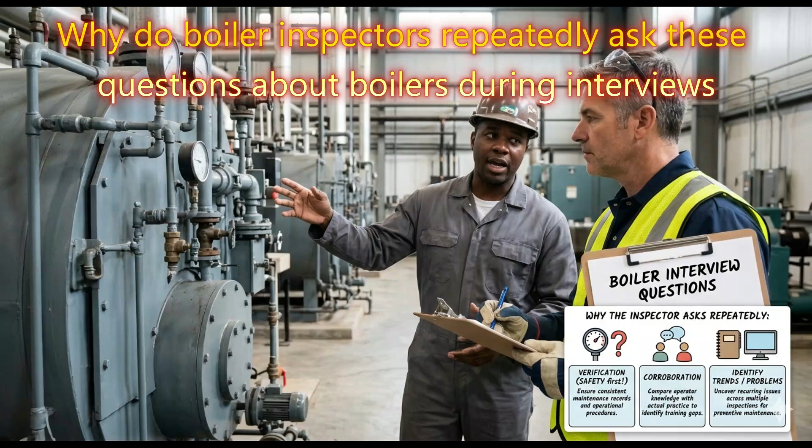Why do boiler inspectors repeatedly ask these questions about boilers during interviews? Discover the most frequently asked boiler inspector interview questions, evaluation criteria, answer strategies, and key competency areas. Essential preparation guide for boiler operators, attendants, and plant engineer candidates aiming to impress inspectors and secure boiler jobs in 2026.

What is the first priority during a boiler emergency? Answer. The first priority during a boiler emergency is protecting human life and preventing further danger. Operators must immediately follow emergency shutdown, stop fuel supply, and activate alarms if necessary. If there is a risk of explosion, fire, steam leakage, or toxic gas release, the area should be evacuated quickly. After ensuring personnel safety, operators should assess pressure, temperature, and water level conditions carefully.

Inspectors ask this question to evaluate emergency response knowledge and safety awareness. Quick decision-making, proper communication, and following standard operating procedures are essential to minimize injuries, equipment damage, downtime, and operational losses during emergencies.

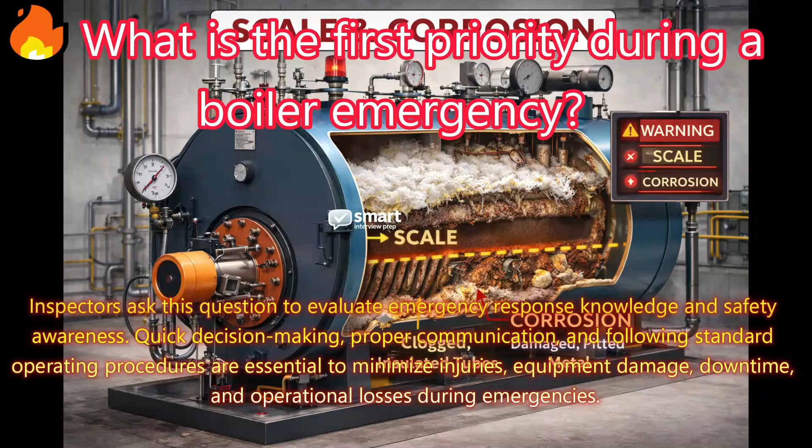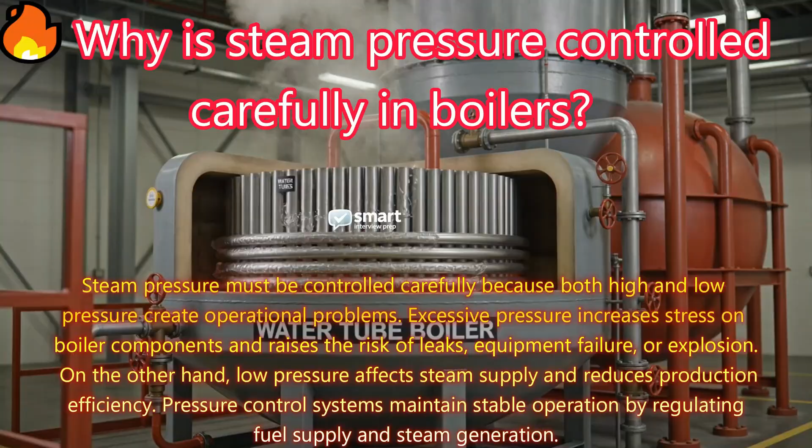Why is steam pressure controlled carefully in boilers? Answer. Steam pressure must be controlled carefully because both high and low pressure create operational problems. Excessive pressure increases stress on boiler components and raises the risk of leaks, equipment failure, or explosion. On the other hand, low pressure affects steam supply and reduces production efficiency. Pressure control systems maintain stable operation by regulating fuel supply and steam generation.

Inspectors ask this question to test understanding of boiler balance and control systems. Proper pressure management improves efficiency, protects equipment, and ensures safe plant operation. Operators should continuously monitor pressure gauges and control systems during boiler operation for stable performance.

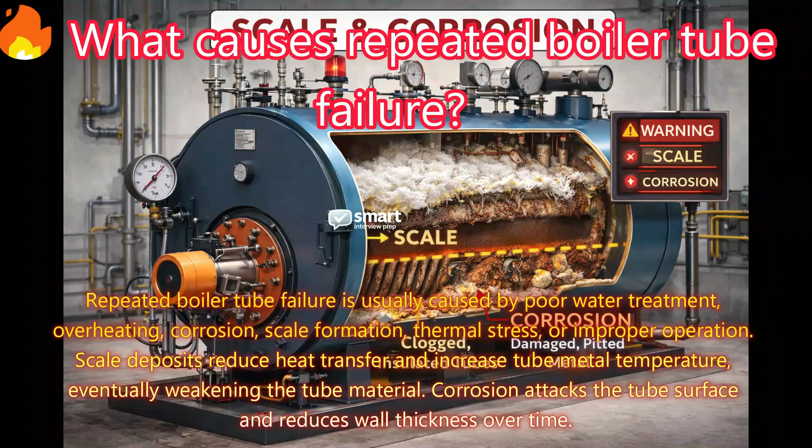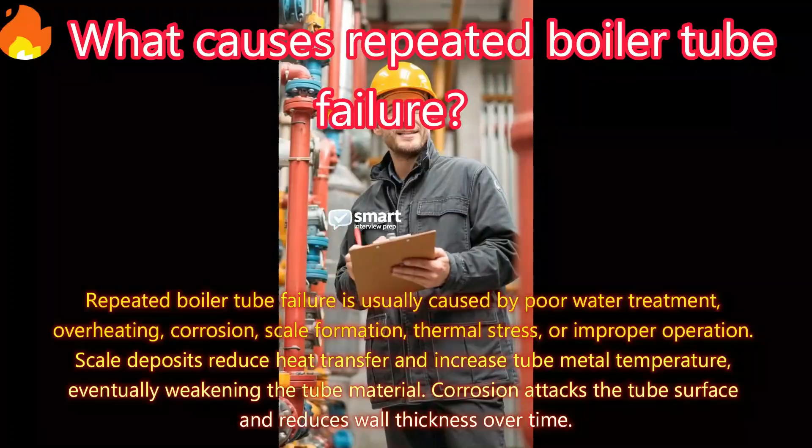What causes repeated boiler tube failure? Answer. Repeated boiler tube failure is usually caused by poor water treatment, overheating, corrosion, scale formation, thermal stress, or improper operation. Scale deposits reduce heat transfer and increase tube metal temperature, eventually weakening the tube material. Corrosion attacks the tube surface and reduces wall thickness. Over time, sudden temperature changes also create thermal stress that damages the tubes.

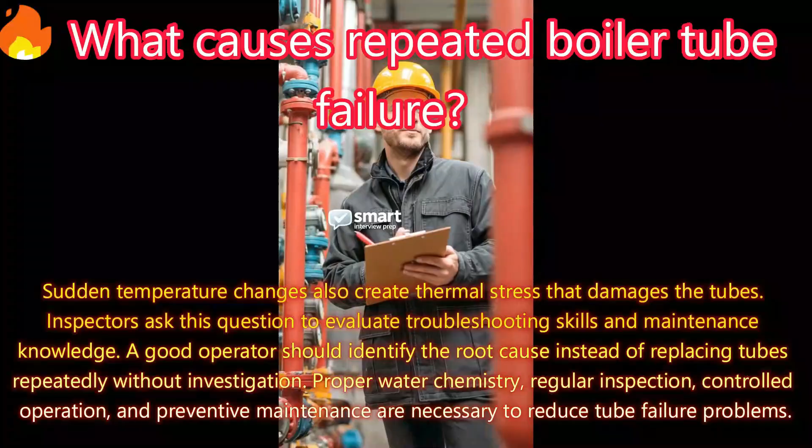Inspectors ask this question to evaluate troubleshooting skills and maintenance knowledge. A good operator should identify the root cause instead of replacing tubes repeatedly without investigation. Proper water chemistry, regular inspection, controlled operation, and preventive maintenance are necessary to reduce tube failure problems.

Why is furnace purging necessary before boiler startup? Answer. Furnace purging is the process of removing unburned fuel gases from the furnace before ignition. Fresh air is circulated through the furnace using fans to clear any combustible mixture. If purging is skipped and ignition starts while fuel gas remains inside, a violent furnace explosion may occur.

Inspectors ask this question because many boiler accidents happen due to improper startup procedures. Purging time depends on boiler design and safety standards. Proper purging ensures safe ignition, protects equipment, and prevents accidents. Every trained boiler operator must follow standard startup procedures carefully to maintain a safe working environment in the plant.

Why should gauge glass be checked regularly? Answer. Gauge glass is used to indicate the actual water level inside the boiler drum. If the gauge glass becomes blocked, dirty, or damaged, it may show an incorrect reading. False water level indication is extremely dangerous because operators may think the water level is normal when the boiler is actually dry. This can lead to overheating and tube failure.

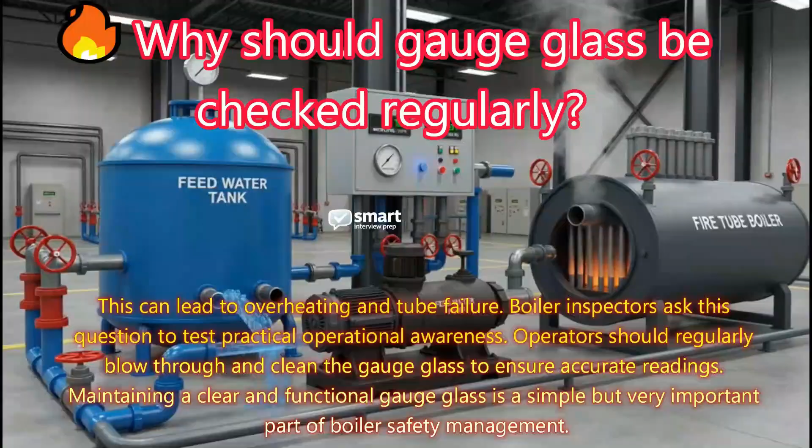Boiler inspectors ask this question to test practical operational awareness. Operators should regularly blow through and clean the gauge glass to ensure accurate readings. Maintaining a clear and functional gauge glass is a simple but very important part of boiler safety management.

What happens if a safety valve does not operate properly? Answer: the safety valve is one of the most critical safety devices in a boiler. Its main function is to release excess steam pressure automatically when pressure exceeds safe operating limits. If the safety valve fails, pressure continues increasing inside the boiler shell. Excessive pressure can weaken the boiler structure and eventually cause a dangerous explosion.

Inspectors frequently ask this question because operators must understand that safety valves protect both human life and equipment. Regular testing, calibration, and maintenance of safety valves are essential. A properly functioning safety valve prevents accidents, reduces operational risks, and ensures compliance with boiler safety regulations.

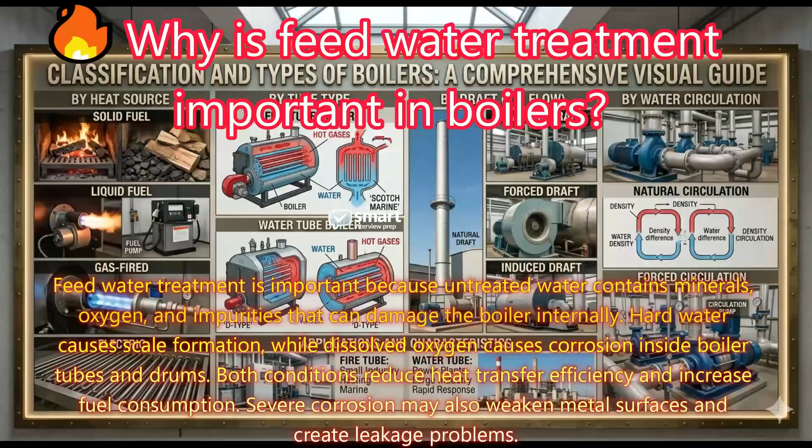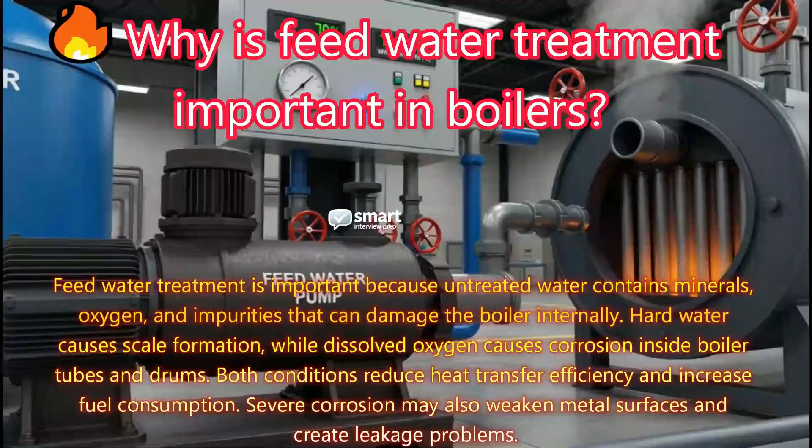Why is feed water treatment important in boilers? Answer: feed water treatment is important because untreated water contains minerals, oxygen, and impurities that can damage the boiler internally. Hard water causes scale formation, while dissolved oxygen causes corrosion inside boiler tubes and drums. Both conditions reduce heat transfer efficiency and increase fuel consumption. Severe corrosion may also weaken metal surfaces and create leakage problems.

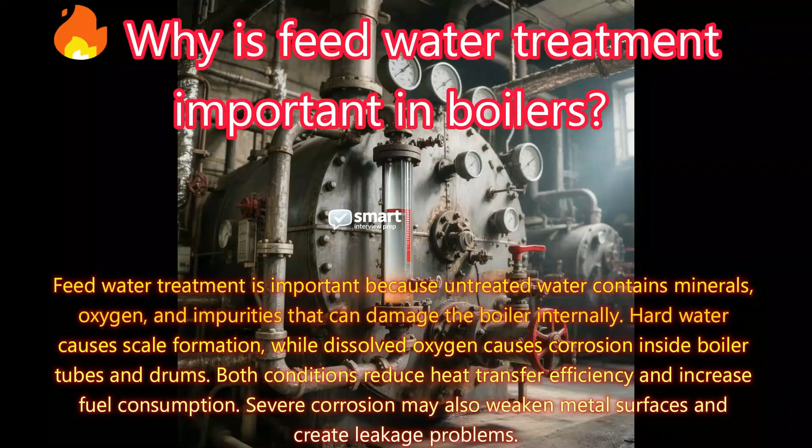Water treatment removes harmful substances before water enters the boiler system. Inspectors ask this question to check whether operators understand the relationship between water quality and boiler safety. Good water treatment improves steam quality, prevents maintenance problems, extends equipment life, and ensures efficient operation.

Why is boiler blowdown necessary every day? Answer: boiler blowdown is necessary to remove dissolved salts, sludge, mud, and impurities from boiler water. During steam generation, pure steam leaves the boiler while impurities remain inside. Over time, these impurities increase water concentration and create scale formation on boiler tubes. Scaling reduces heat transfer efficiency and causes overheating, fuel wastage, and tube damage.

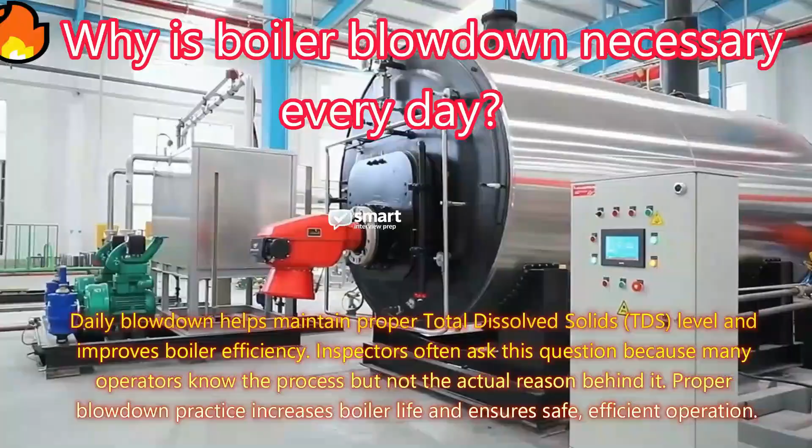Daily blowdown helps maintain proper total dissolved solids (TDS) level and improves boiler efficiency. Inspectors often ask this question because many operators know the process but not the actual reason behind it. Proper blowdown practice increases boiler life and ensures safe, efficient operation.

Why is flame failure dangerous in a boiler furnace? Answer: flame failure becomes dangerous because fuel may continue entering the furnace without proper combustion. Unburned fuel accumulates inside the furnace and mixes with air, creating an explosive atmosphere. If ignition suddenly occurs, a furnace explosion can happen within seconds. That is why operators must immediately stop fuel supply whenever flame failure occurs.

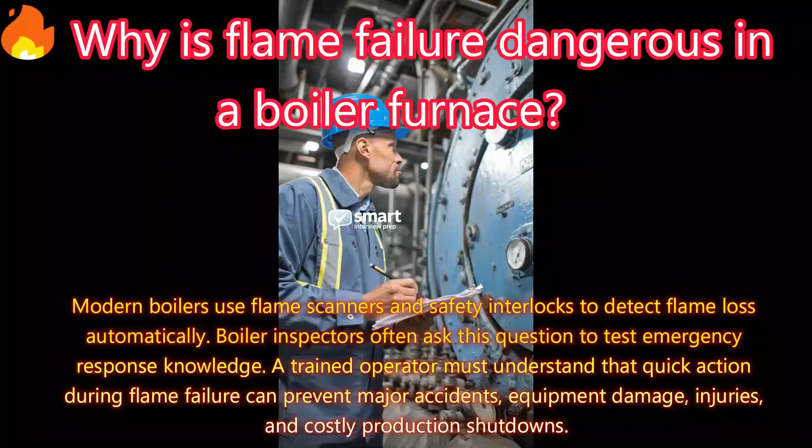Modern boilers use flame scanners and safety interlocks to detect flame loss automatically. Boiler inspectors often ask this question to test emergency response knowledge. A trained operator must understand that quick action during flame failure can prevent major accidents, equipment damage, injuries, and costly production shutdowns.

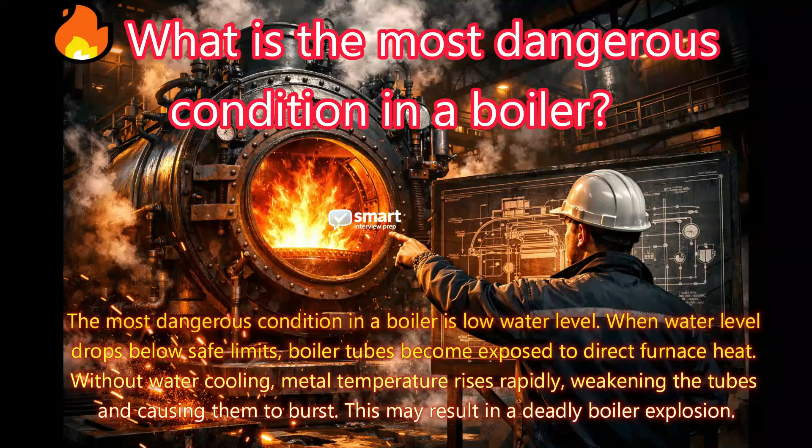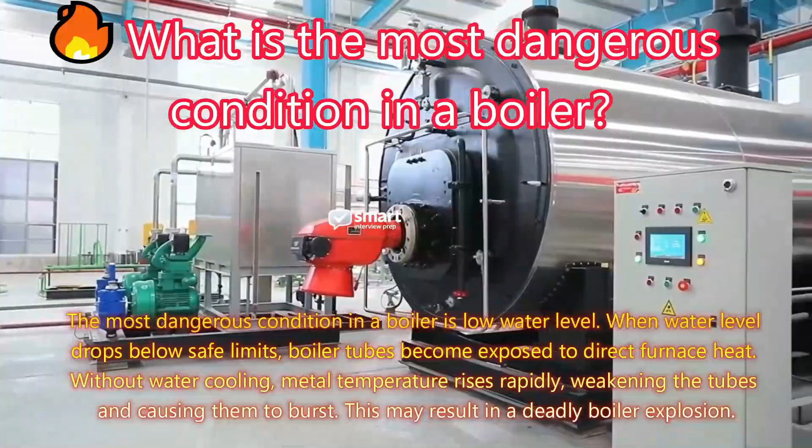What is the most dangerous condition in a boiler? Answer: the most dangerous condition in a boiler is low water level. When water level drops below safe limits, boiler tubes become exposed to direct furnace heat. Without water cooling, metal temperature rises rapidly, weakening the tubes and causing them to burst. This may result in a deadly boiler explosion.

Many operators focus only on pressure, but inspectors often check whether you understand the importance of maintaining proper water level. Regular monitoring of gauge glass, alarms, and low water cutoff devices is extremely important for safe operation and accident prevention in any steam boiler system.